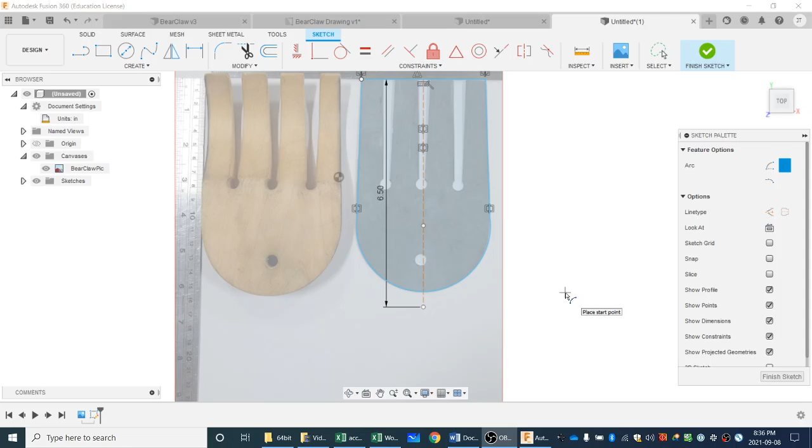Okay, we're back. This is the third tutorial in the series on our Bear Claw Salad servers. In the last tutorials we brought in an image as a canvas, calibrated it, and traced the outline of the shapes. Now we're going to add the holes at the bottom of the fingers.

We'll zoom in a bit and pick the circle tool. You can pick it here, or hit C on your keyboard to automatically start drawing circles. Now, where am I going to draw it? Maybe I shouldn't hit C right away and start drawing.

I think I'll draw a line straight across the center of all the circles approximately. Let's hover over the center line until I'm about the middle of that one, and click. Make sure the X is on your cursor, which tells you you're attaching to that center line. Then we'll pull out some distance, just for reference, this line - that's good enough.

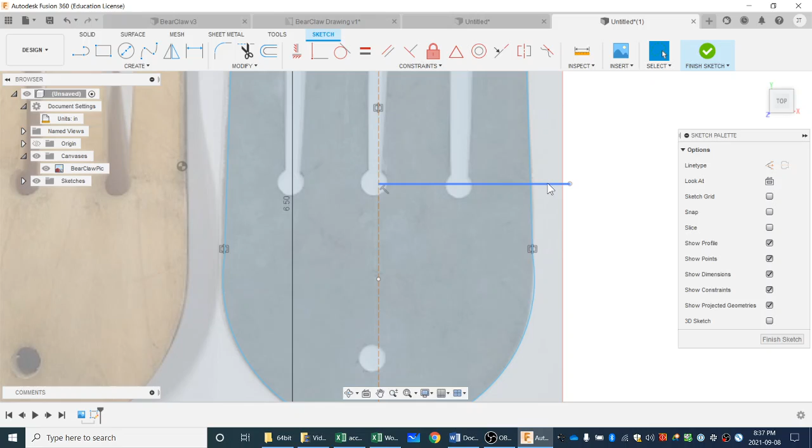This one I'll also make a construction line, so I click it and hit X on my keyboard. Now I'd like a line to go in the other direction too, so I have a nice reference line all the way along. I've drawn the line that way and hit X to make it a construction line.

Okay, now it's time to draw a circle. The circle, of course, should be in the middle, the third one. It's not going to look quite right because of how the picture was taken, but we know it should be in the middle, so we'll pull it out.

Now, how big? We'll use the actual image for reference. We'll make our circle about the same size, and we can see it's in the 0.33 range or so. It's nice to make it a size we can drill, so let me pull up my calculator and guess: 5 divided by 16, a drill size in our index, equals 0.3125.

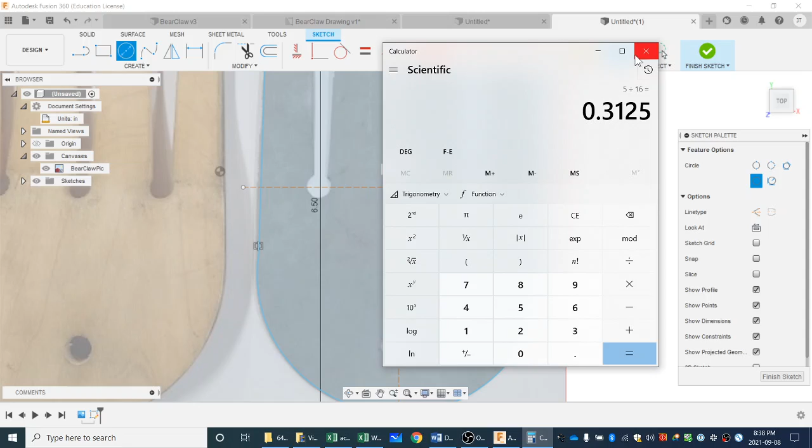That's pretty darn close. So we're going to make this circle that size - pull it out and key in 0.3125. That'll be 5/16, and we can drill that using a 5/16 drill bit later.

Okay, next we want the outer circles. As much as they look like they're wherever they are, we want them to be a certain distance. So we're going to draw another circle and make sure we attach it to this line.

I'm going to put it way over here just for craziness. So the X is telling me I'm attaching it to that line, and then I'll key in 0.3125, Enter. I'll draw one on this side too - circle, attach it to the line, and 0.3125.

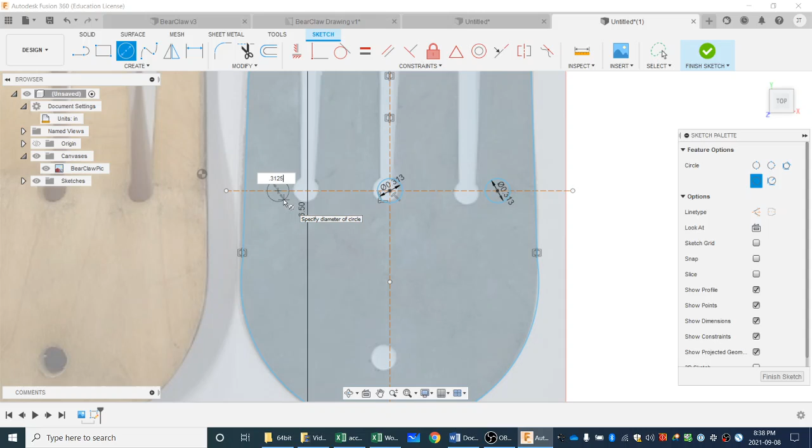Now the only thing left is to establish the distance we want. I already looked into this so you don't have to guess. I'll hit D on my keyboard for dimensioning - notice my mouse has a little dimension symbol attached now. Click this center one on its edge, click this right one on its edge, and pull downwards. If you punch in 1, that's going to work - 1 inch apart.

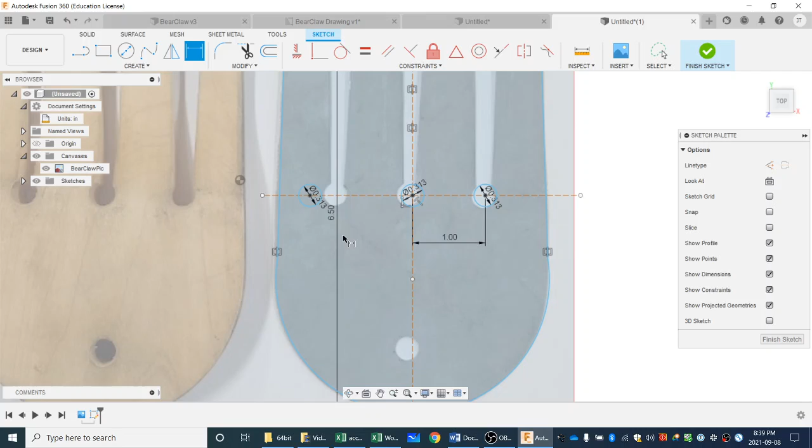So then we'll do it over here. We're still dimensioning - notice the mouse has that sign. We'll say here and here, the distance between those - 1 inch. Perfect. Okay, if I turn off the canvas, because it's hard to see things right now, I can go to my browser tree and turn off the canvas with this eyeball, and you can start to see what we're making.

Other things popping up are these little symbols - these are called constraints. Like this triangle here, it tells me that's constrained to the middle. There are other constraints to look at, but sometimes they get in our way and make things confusing.

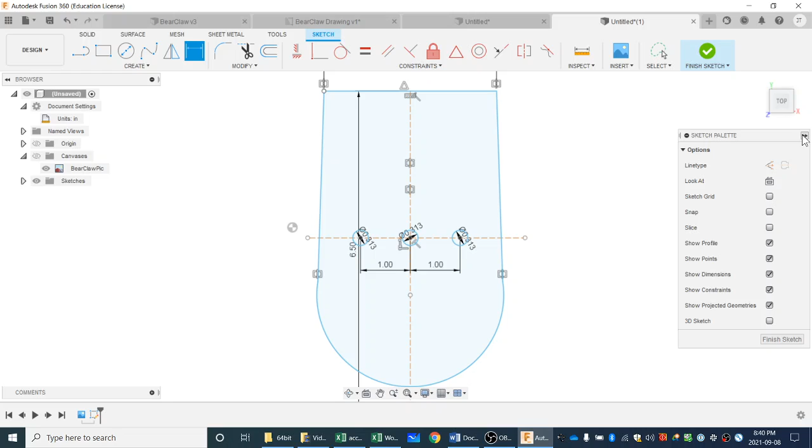You can head to your sketch palette, which sometimes is collapsed over here, and turn them off - show constraints, don't show constraints. Maybe the dimensions are in your way too, you can turn those off as well - show dimensions. I like leaving them on for now because I'm using them.

Okay, so that's it - circles are positioned and sized. On to the next tutorial. In the next one, we're going to do the angled fingers that we need. I'll turn the canvas back on - we'll have to do these angled lines for the fingers. That's the next tutorial, see you there.